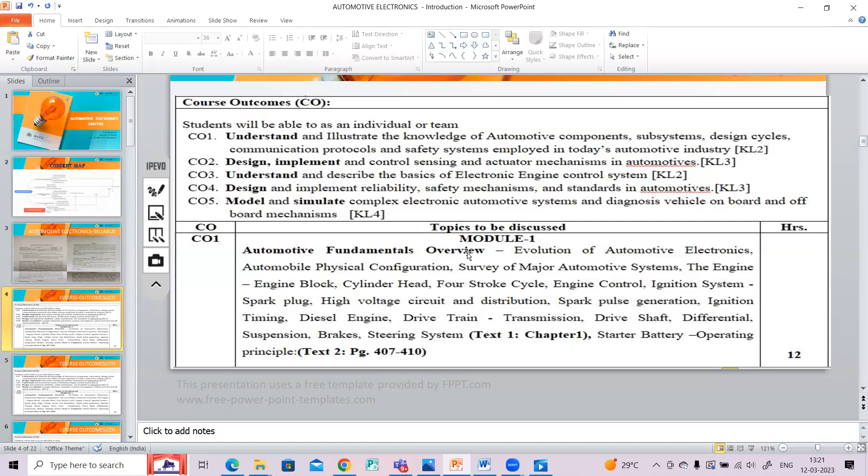Coming into the subject that is automotive fundamentals, the first concept they have framed is evolution of automotive electronics.

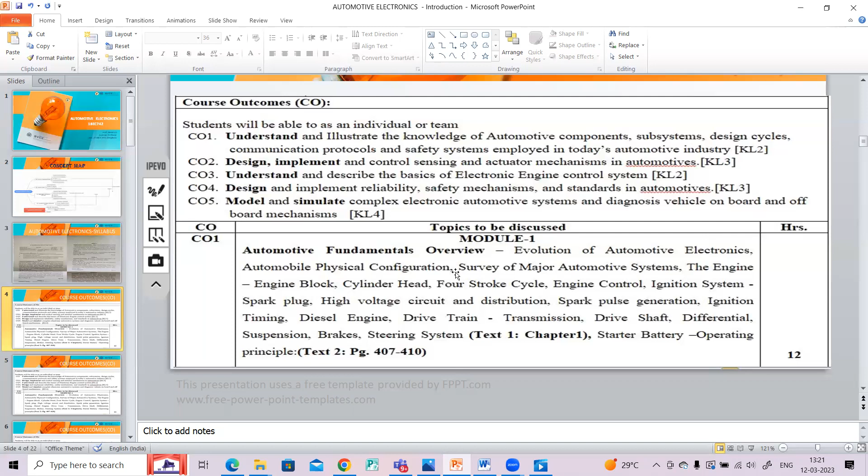If you try to see with respect to that, there is one concern I've framed, that is automotive fundamentals overview. The module one tells about the concept where we have framed it.

Here we are going to discuss in depth about the content that tells about the automotive fundamentals overview along with the air fuel systems.

It contains actually 12 hours duration to complete this, and I've framed this to complete within 10 hours. That is with respect to the date planned and the date executed.

Fine. So every class with respect to the timetable, according to the calendar of events, I'm going to frame the subtopics which have been highlighted in the course manual, and the same is going to be shared on the MS Teams link also.

So first I'm going to start with the fundamentals, automotive fundamentals overview. I'm going to discuss about the four-stroke engine and engine control, because we are touching in-depth discussion about the automobile sector, right?

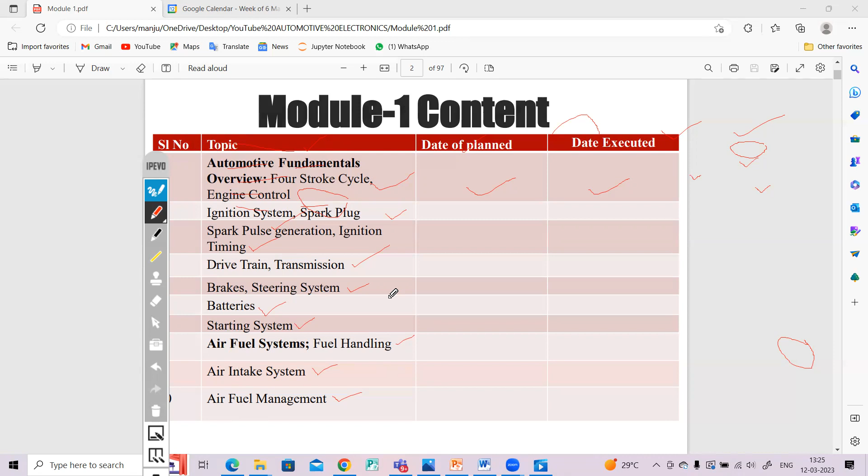I think we won't have any doubts related to the topic shown in my slide. So coming to fundamentals, that is the four-stroke engine. Let me go with...

Some physical overview, that is the configuration of the engine, that is automobile. So here, these systems include the following. To form the automobile physical configuration, the first important one is the heart, that is nothing but the engine.

Then we'll discuss the drivetrain. There we'll see what type of transmission we are going to see, and what type of differential we are going to see, and how the axles play an important role.

And we'll see suspension, that is mono suspension and dual suspension, to make comfort using some drum brakes and so on. There we are going to see the suspension here, something disc or drum brakes, and the steering, either power steering, manual steering, or semi-manual, and the brakes, like suspension - mono suspension and dual suspension.

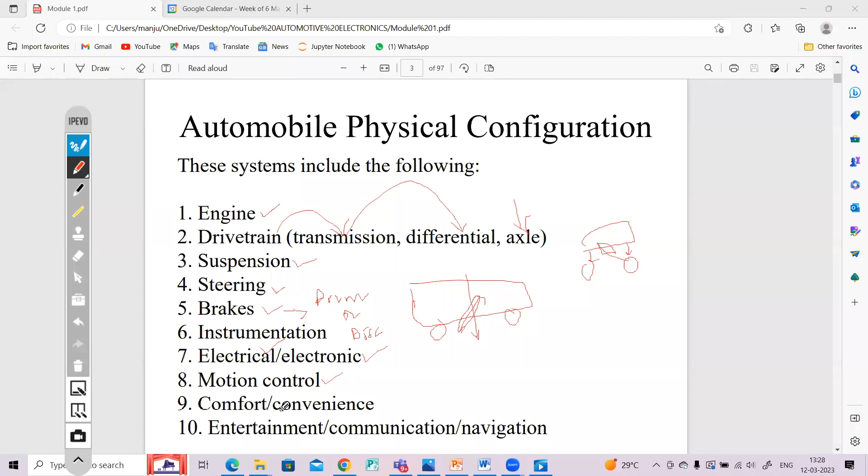Then comfort, convenience, entertainment, communication, and navigation, like Bluetooth connectivity, onboard MP3 player, onboard FM, onboard navigators, or onboard call connectivity. Navigator means nothing but tracking of the respective road, using some global positioning system.

And the communications in the form of technology we are going to use, like Wi-Fi and Bluetooth. While driving, we are able to get connected and make calls also - voice calls or video calls. In the front console, we showcase all measurements like fuel efficiency, trip details, and this type of entertainment and communication feature is going to be seen there.

It's all related to automobile physical configurations, which includes everything starting from the engine to entertainment.

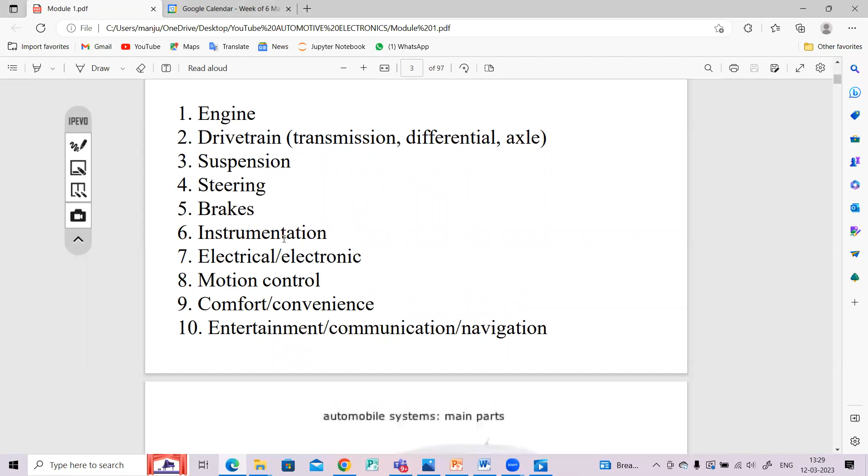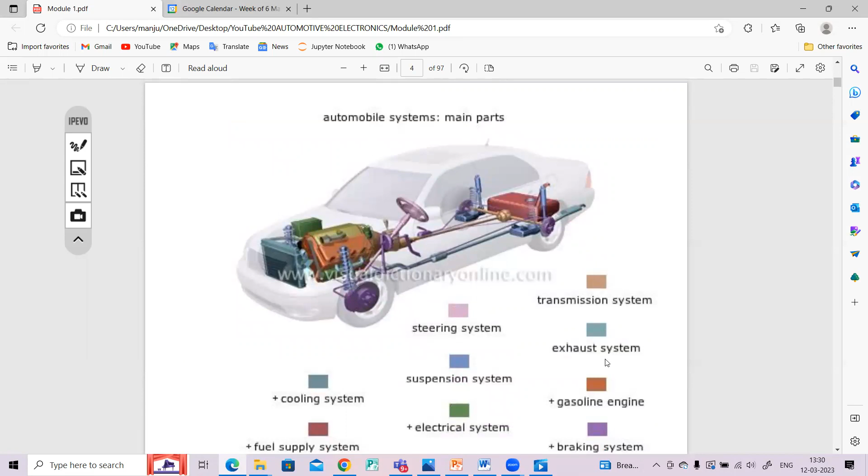So coming to the automobile system main parts, this is very important. She is coming into the automobile system. As I told, it's related to the automobile sector, along with some electronic components being added to make this vehicle smart.